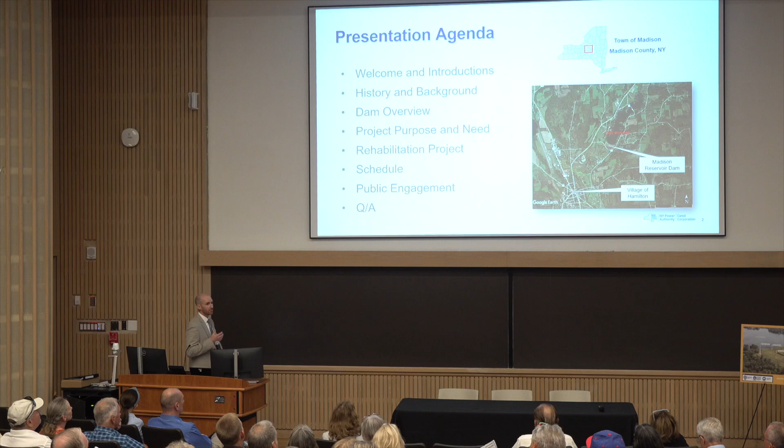We'll dive right in here. We've got a lot to cover, and as already mentioned, there's been a lot of work going on behind the scenes the past few years. We have progressed the project. Everything isn't finalized yet, but we're certainly at a point right now where we need to get out here. This turnout is great. Greg, thank you for allowing us to get the lay of the land here. It's great to see people from the reservoir, from the lake, from the village, and other areas.

I encourage you to pay attention and think of questions. We've got our engineering team here, and others from Canals, and we really want to get feedback from all of you tonight. We'll also tell you what you should begin thinking about, and how you should start preparing for this project, because it is coming.

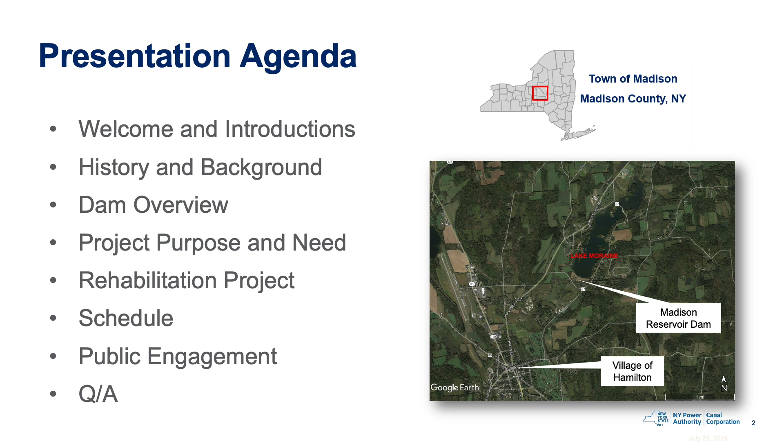So to walk through our agenda: we've already done our welcome and introductions. We'll do a brief history lesson on the dam and the Chenango Canal, then shift to current times with an overview of the dam. I'll talk about why we're doing this project, the purpose and need for it, and give more detail on the rehab project that's coming. We'll touch on the schedule at a very high level—we're still pretty far out, so we're laying out some year milestones now. Then Jackie will give a brief public engagement update, and we'll get to some Q&A.

So why now? My job's been made pretty easy here—I think we really heard from the mayor, the supervisor, Joe and Jackie why we're here tonight, and I think you guys know too. The first circle here is the New York State Canal Corporation. Canal Corp is the owner of the dam, and we fully accept all responsibility for the structure. We're responsible to operate and maintain it, and to ensure the safety of the structure for the people on the reservoir and everybody downstream.

So it's our dam. What are we trying to get to? We'll touch on some of these points throughout the presentation, but it comes down to a few things: a state of good repair—we're trying to get the dam to this state. Resilience—weather seems to be getting more extreme these days, we've all heard about it, so we're going for this higher level of resilience. And in doing that, we're going to reduce the risk that dams do pose to the communities downstream—risk reduction. To really hammer it home, public safety is paramount here in this project, you'll hear me mention that a lot. As we've heard from the supervisor, the mayor and others, we fully recognize that this dam and reservoir really is a great asset for the community, and there's public benefit here. So these are some of our main themes for the project.

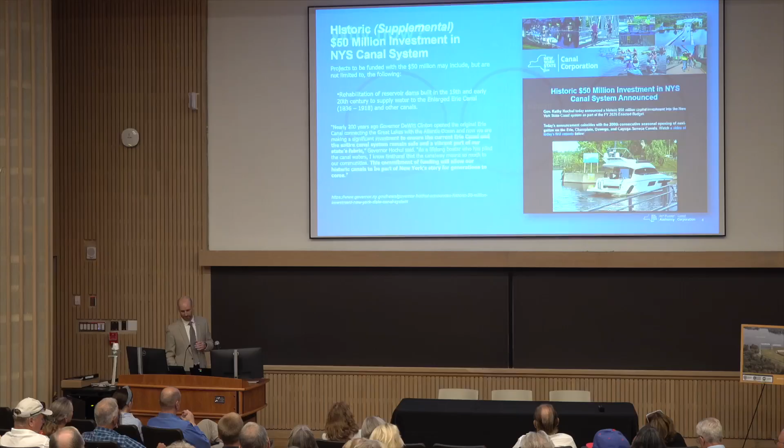Drilling in a little more on where we're at in funding this project: back in May of this year, the governor made an announcement, and it was really exciting for us. She announced an additional $50 million investment in the state canal system. We have our typical annual operating budget and our capital budget, but this was an additional $50 million that we hadn't typically gotten—a big deal for us, because now we have additional funding to take on some of these projects. Drilling into that press release, I encourage everybody to go ahead and Google it—you'll find it quickly and can read the whole thing.

The first bullet mentioned for projects slated to be funded through this $50 million: rehabilitation of reservoir dams built in the 19th and early 20th century to supply water to the enlarged canal, 1836, and other canals, being the Chenango Canal, being this reservoir. So this project, Madison Reservoir Dam Rehab, is a top priority, and it's going to be funded by this additional $50 million.

I'm going to read a couple more quotes from the governor because I think they're telling for how she feels about the canal system, and how you all feel about Lake Moraine and the ties you may have. The investment is to ensure the current Erie Canal and the entire canal system remains safe and a vibrant part of our state's fabric. This commitment of funding will allow our historic canal to be part of New York's story for generations to come. Jackie mentioned some of the hardship we're going to have in the meantime, but we're really forward looking here, and we're looking to the future.

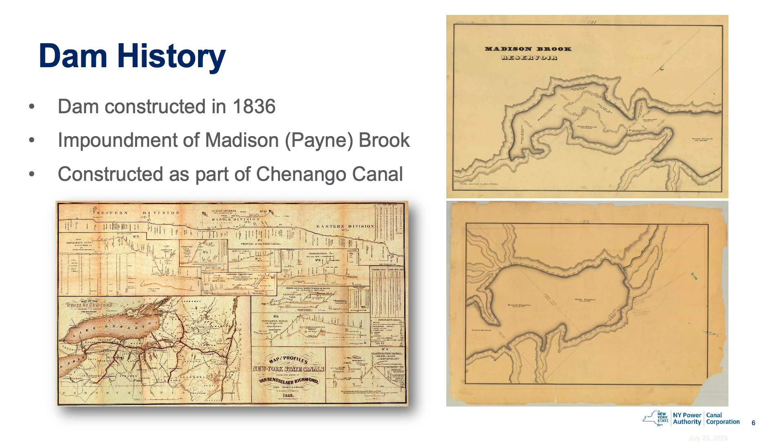The two drawings are original contract drawings showing the limits of the reservoir when it was built. I'll walk through a couple photos, but it's interesting that as you go through the village, you see nods to the canal days of yesteryear throughout, with some murals and historical markers. The Chenango Canal connected Utica and Binghamton, and Utica connected to the Erie Canal, allowing trade and commerce along that route.

The reservoir served as a feeder to the canal until 1878, when the Chenango Canal closed. It was one of seven feeder reservoirs in the area that fed the canal, and you're probably aware of a lot of the other ones.

A lot of people have driven out of Utica - you climb up Route 12, climbing grade, and in order to do that the canal had to be fed by reservoirs. There were also on the order of 116 or 117 locks that the canal needed to get boats up and down out of Utica and then back down to Binghamton.

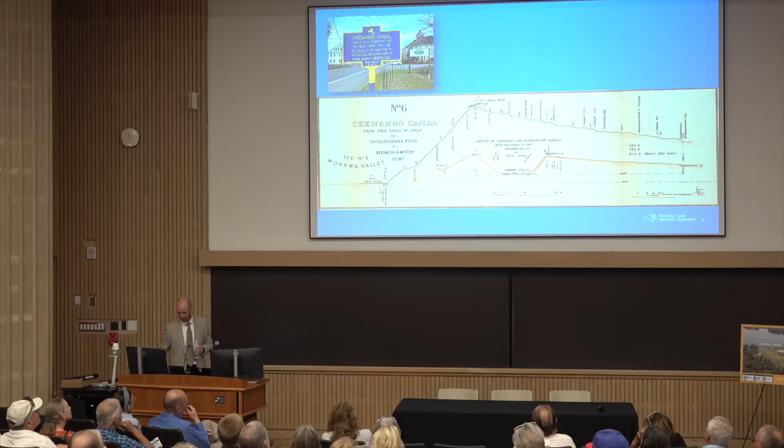So fast forward, looking more now to modern day times. The reservoir, most people probably know, no longer is used for canal operations at all. There is no Chenango Canal anymore. It closed in 1878. It does not feed the Erie Canal.

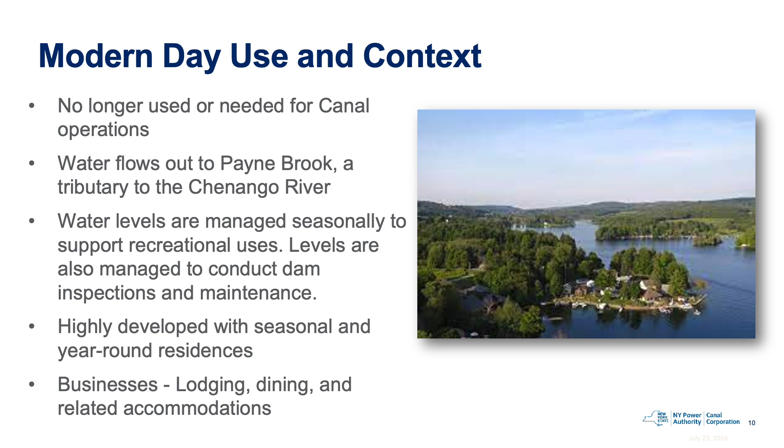Water flows out to Payne Brook and eventually makes it down by Colgate to Taylor Lake and on its way to Chenango River. We're responsible for maintaining the dam and the outflows from it, so we manage those seasonally to support recreational uses, really for public benefit. And we also manage the levels to conduct maintenance and do inspections, because this is a man-made structure.

This is all obvious stuff. The reservoir now is very highly developed. There's seasonal, there's year-round residences, and it really kind of supports a microclimate or economy of lodging, dining, some businesses, and related accommodations.

Just a little bit more on what it's used for now. So it's a public asset, an ecological asset. There's many different users of the reservoir, not just the folks that live on it, but it's very popular for fishing, boating, swimming, and other water sports, and obviously Colgate has an interest in it too.

So I'm going to shift now to just an overview of the dam. Again, this is very, very high level. If you do want to learn more about it, I encourage you to talk to some of our engineers later in the Q&A or in the after session. So I'm just going to kind of hit the main features of it.

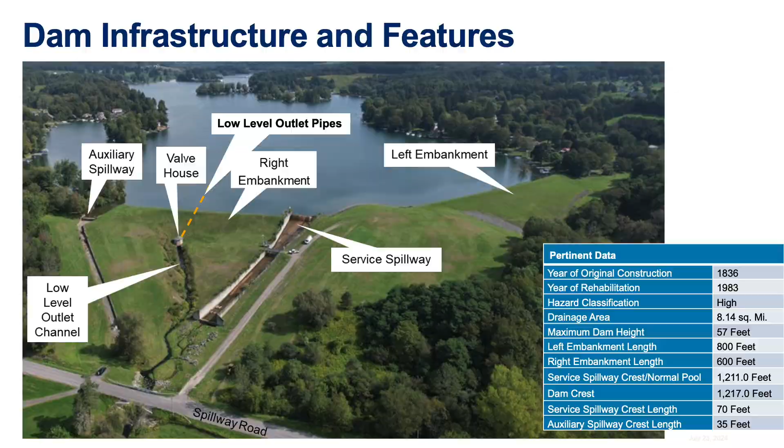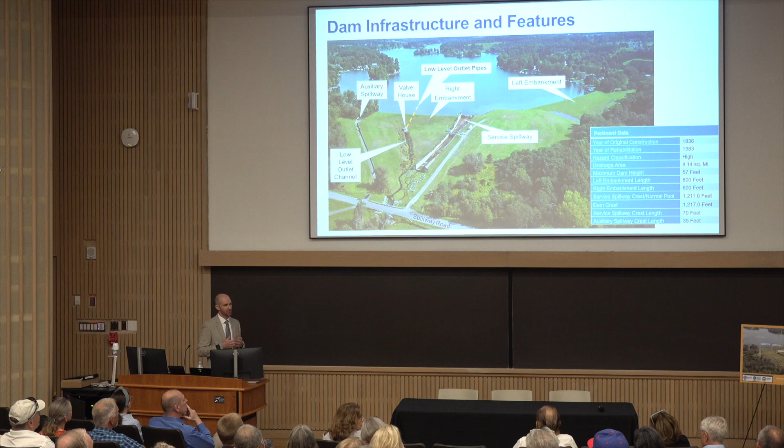Just a few highlights on the pertinent data. This reservoir is fed by an 8 square mile watershed. Greg always reminds me, out of the reservoirs we have, it's one of the larger watersheds, and that's an important fact. And when we get to some of our control of water measures and our drawdown measures, that's really an important thing. At the highest point, the dam, I believe it's the left embankment, is 57 feet in height.

And it's hard to wrap your head around some of the numbers I'm going to share now, but the volume, how much water is this holding back? It's a lot. 176 million cubic feet. And to put that into gallons, it's over 1.3 billion gallons. So there's a lot of water in there. I don't think that's a surprise to anyone here.

Just a little bit more on some of the primary features of the dam. There are 2 earthen embankments, totaling 1,400 feet together. The right embankment is 600 feet long, and the left embankment is 800 feet long. Again, these are built from earth.

The low-level outlet works, I talked a lot about them already, but we have an intake structure within the reservoir. There's 2 16-inch cast iron pipes that convey flow out, and then they're controlled at the brick valve house that you can see from the road.

That allows us to always pass flow through those pipes, because essentially the reservoir impounds Payne Brook. We have to keep flow going through Payne Brook, so that provides our minimum flow. We're always passing flow through there, and we'll always be passing flow through there when we do get to the rehab project too. An important function of the low-level outlets is, in case of emergency, maintenance, or inspection, it allows us to bring the reservoir down.

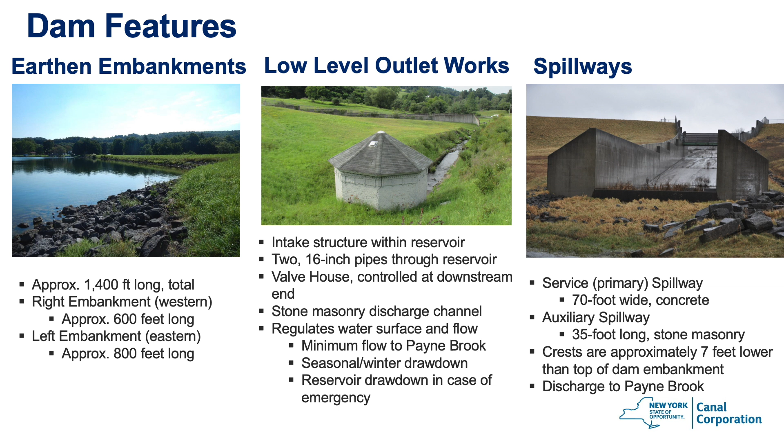The spillway, it's probably pretty obvious to most people, but it serves a very important function. We get a storm, we get a big flood, and this allows us to safely pass that flow through our dam.

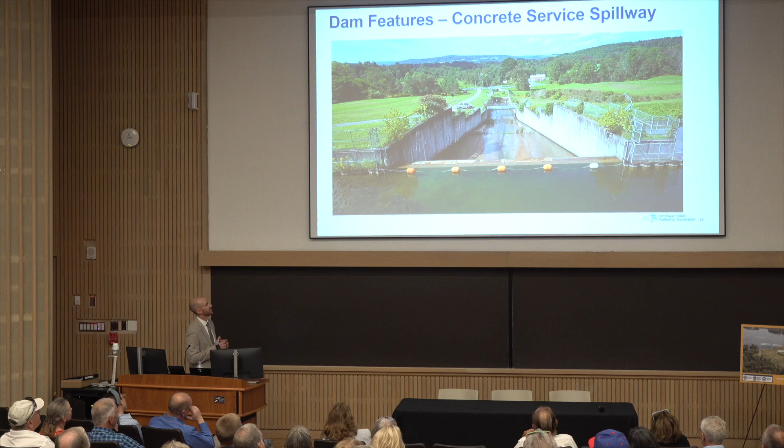Okay, so just some really interesting views, our engineers got these from drones. They're just really neat photos, probably perspectives you haven't seen. This is, pretty obvious, standing and looking from within the reservoir, looking downstream towards Spillway Road.

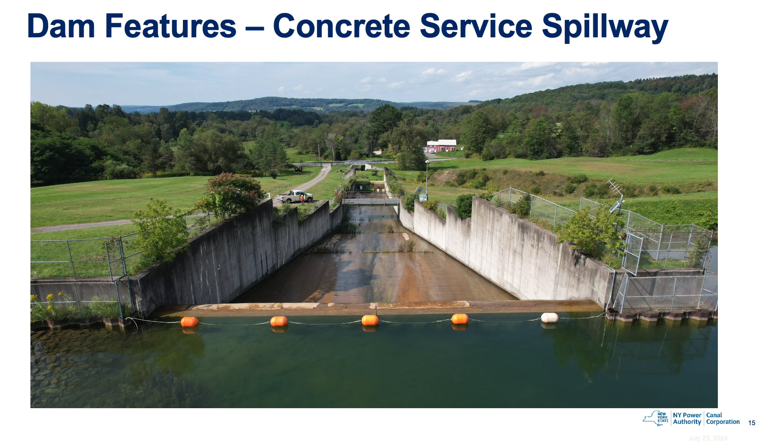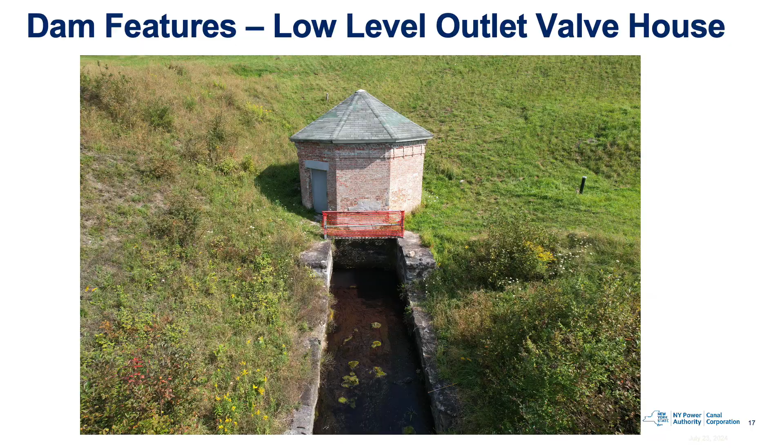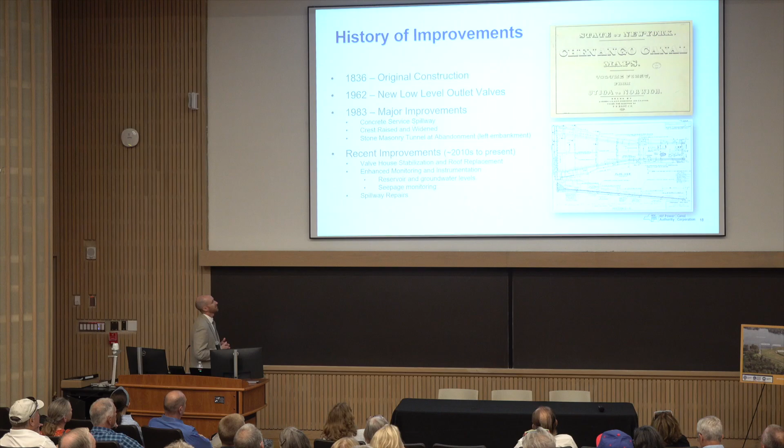So just shifting now to, you know, this dam is almost 200 years old. Dams are man-made structures, they require operation and maintenance. They require upgrades, they require repairs. This list is not by any means all-encompassing, but we just wanted to highlight some of the major points in the history of the dam.

Built in 1836, approaching 200 years old. In 1962, fast forward over 100 years, there were new valves that were installed in that valve house on our low-level outlets.

In 1983 was really our only major project. I saw some of the drawdown photos. That's awesome, I'm glad somebody brought those for that work. But that was our one and only really major rehab project to date on this dam.

So that big concrete service spillway that was built during that project, there was some earthwork. The crest was raised and widened. And we'll touch on it briefly, there's an old stone masonry tunnel on the left embankment that was abandoned to some degree.

Some of the recent improvements we've done, from the 2010s to present, we've done some stabilization to that old valve house. It's in tough shape, but it's a historic, interesting structure. We've installed a lot of electrical and water level type monitoring devices that really give us a good real-time and remote look on the condition of the dam, and I'll touch on some of that.

So it allows us really to see the water levels within the embankment of the dam. That's critical to understanding how your dam's performing, and also the water level within the reservoir. Recently, we did some repairs to the spillway back in March, and I'll get to that.

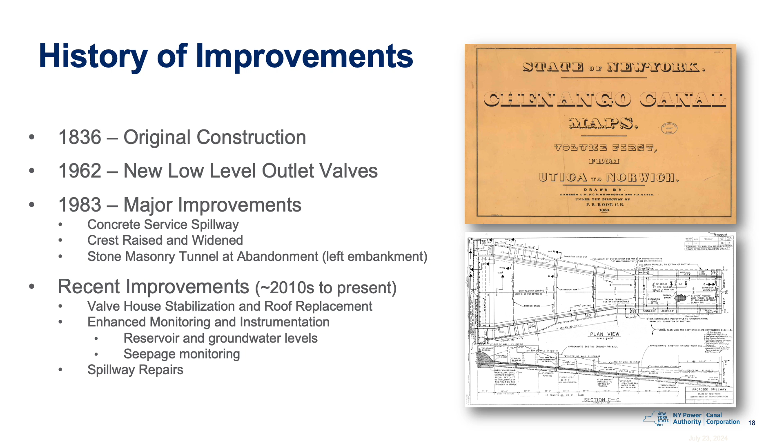But you look at this, you consider how old the dam is. You look at the original title sheet for the contract drawing, and this is it right here, right? It's almost a 200-year history.

So that's it for the overview of the dam, the history of the dam. We're going to start now getting into why we need to do this project, and then eventually what the scope of the project is.

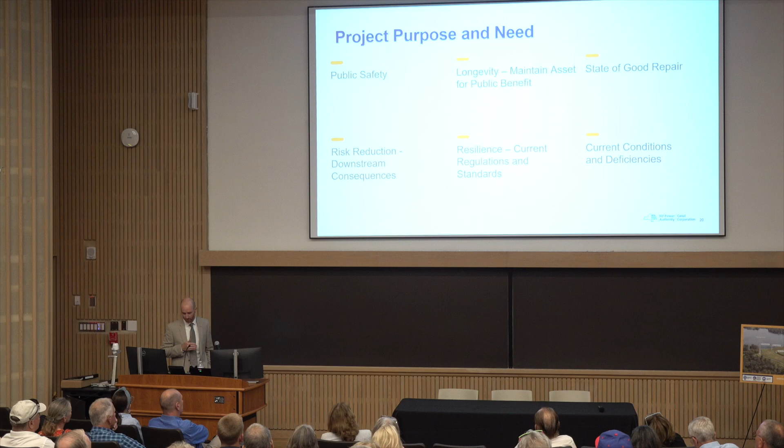So some more high-level bullet point type drivers, and I'll hit on each one of these in the ensuing slides, but let me just walk through them here. Public safety is number one. We were here 4.5 years ago, the mayor talked about why there's a downstream population at risk from this dam. Any dam poses a degree of risk out there, and that's no different here.

I touched on that already, so risk reduction, downstream consequences, longevity. We saw the governor's press release, we've heard some stories already. We're looking to maintain this asset really for public benefit. That's a big driver here.

Resilience, I'll touch on the current standards and the evolution of engineering over the past 200 years. But we're trying to get to this level of resilience that's adequate, that will provide public safety, it'll provide that risk reduction, and kind of what our guiding regulations and current standards are.

Related to this, we mention a lot nowadays that we're trying to get to this state of good repair. That allows us to get to an acceptable level to operate and maintain this dam. We're not in a reactive mode, but in a good state of repair, able to operate this thing well. And we don't hide behind this - there are deficiencies at the dam. I'll walk through those, and that's obviously a driver here too.

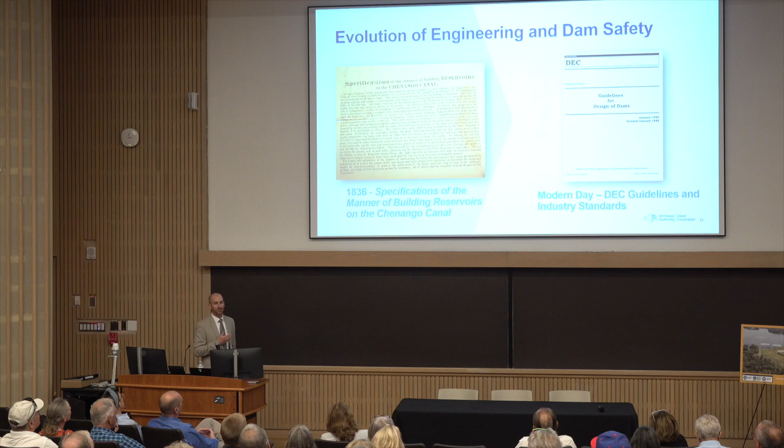So I touched on this already, but there's kind of two sides to this. Just as the use of the reservoir has evolved, as originally feeding the Chenango Canal, so has engineering, so has the industry of dam safety, so has our understanding of public safety and risk. This is a shot on your left of the original specifications these reservoirs were built to, and it's pretty interesting to read some of the verbiage there.

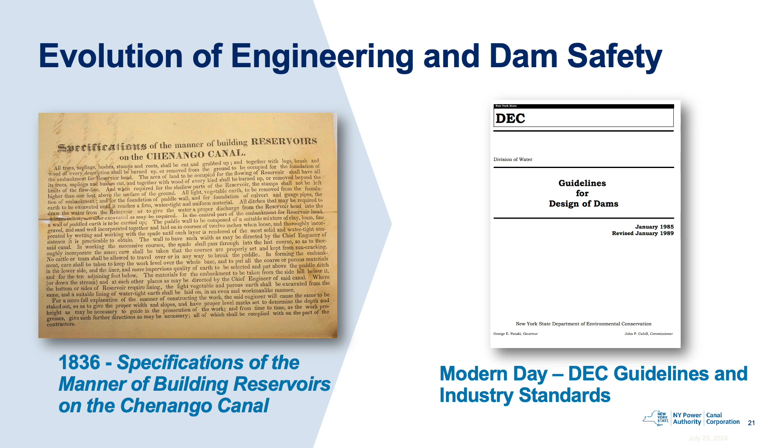We've evolved to more modern day standards, and in New York, we're governed by and aiming to be in line with the DEC guidelines for the design of dams and other industry standards. That's what we're going for. But the point is, it really should come as no surprise that buildings are built differently than they were 200 years ago, and it's no different with dams. So things have evolved - the hazard classification and the condition of the dam.

In New York State, and really anywhere in the country, dams are classified due to their consequences of failure. DEC has classified Madison Reservoir Dam as a high hazard dam. So what does that mean? A dam failure would result in widespread or serious damage to homes, damage to infrastructure, important utilities, or substantial environmental damage, such that loss of human life or widespread substantial economic loss is likely. It's obvious we do have some homes, we have the village downstream of the dam.

An important thing on the classification of the dam versus the condition - they're somewhat two different things. The hazard class of a dam is an indication of the estimated consequences if the dam were to fail. It is not necessarily an indication of the condition of the dam.

Dams are regulated structures. We follow DEC guidelines. Recently, we've been out there very frequently doing inspections and monitoring. We're required to do biannual and annual inspections. DEC comes out to inspect this dam biannually, so it's regularly monitored and regularly inspected. We're very upfront about some of these condition ratings, but in the most recent DEC inspection, the dam was rated unsound, deficiencies recognized.

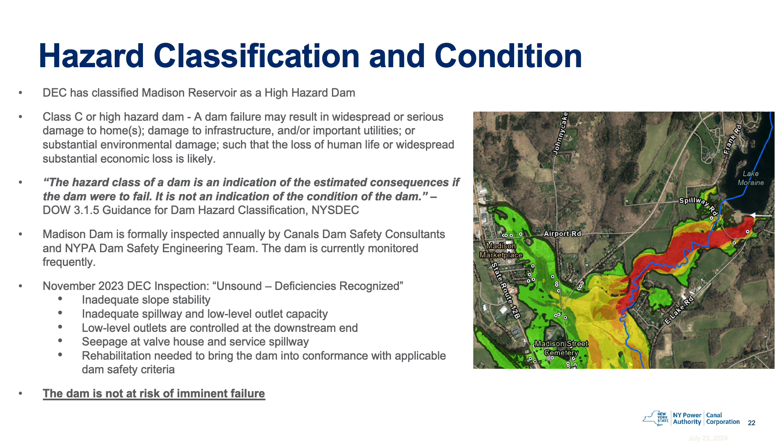The last bullet here is important, and Joe mentioned this already, thank you - the dam is not at risk of imminent failure. I'll say it again, it's not at risk of imminent failure. If it were, we would be doing things much differently right now.

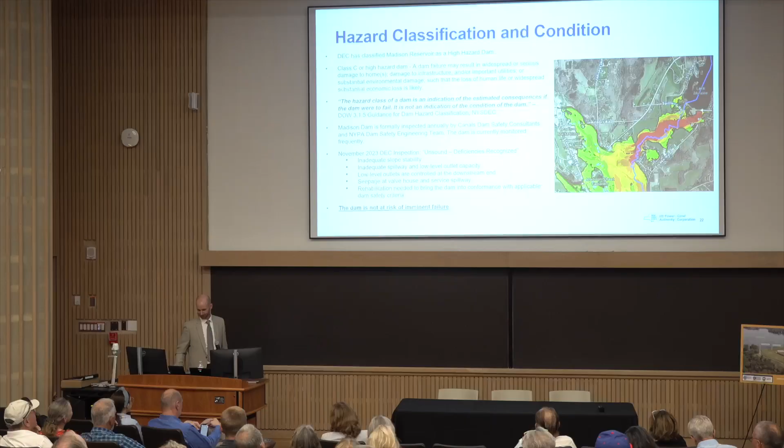I'm going to go through these pretty quickly - this is not an all-encompassing slide, but these are some of the primary deficiencies. I think it's important to remember the age of the dam, when it last underwent a rehab, and the fact that dams are man-made structures that require upgrade. So I'll walk through each one.

Number one, the spillway - again looking at modern day standards, it does not meet the current capacity requirements. The embankments, the earthen embankments, are very steep. Compared to modern standards, they're somewhat irregular - they undulate, you've probably seen it from the road. Related to the embankments, the crest, the top portion of the dam, is very narrow compared to modern day standards. The low-level outlets have a series of issues - the important one is the drawdown capacity.

The current DEC standard is to be able to bring your reservoir down to the 90% volume level in 14 days. The capacity we have right now is closer to 29 days.

I'll make one point that's not unique to this dam. Many dams in this area are in the same situation where they do not have sufficient drawdown capacity. The controls of the low-level outlets are at the downstream side at the valve house, so the pipes are fully charged, under full pressure through the dam. They're old, original cast iron pipes, very old. And we do have some seepage that shows itself at this valve house.

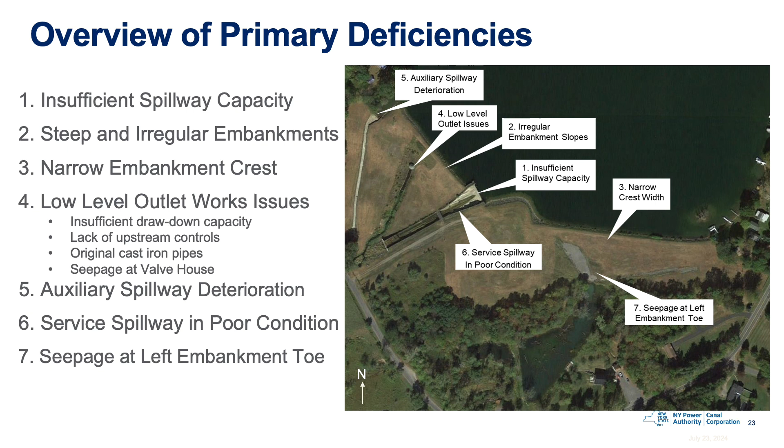The service spillway, we did some repairs not too long ago, back in March. There are some issues with that spillway as well. This is the one in the middle, the concrete spillway. And then we also have a seepage point at the left embankment toe where there used to be a tunnel that served as an additional outlet from the dam, which we're monitoring too.

Fast forward to May—this is probably in recent memory for many folks on the reservoir. The seepage we have at the left embankment toe from that old tunnel has always been there, but it started showing itself in a way it hadn't before. It appeared that it may have been increasing, it was roiling somewhat. In the end, we don't think things were really that much different, but as a dam owner, you always have to think of the downstream consequences, and you really have to be overly safe.

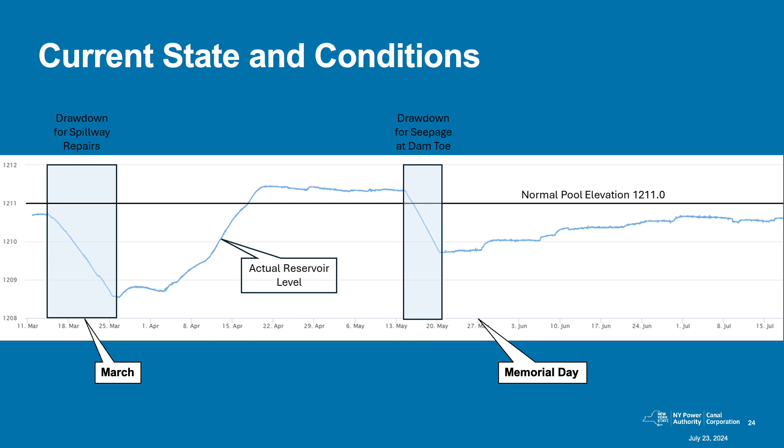But bluntly, we take no pleasure in doing this. This isn't something we wanted to do at all, but this is where we're at with the dam right now—we're really in a reactive mode. Things pop up, we have to take action, and there's really no way around that. Ultimately, the point here is justifying the need for this project. We can't continue like this. If we do, you're looking at more situations like this. What we want to get to is a state of good repair, where we've got a good handle, we're able to operate and maintain this thing, and we don't have to do this.

Okay, so shifting to the rehab project—we're in design right now. Design's not complete, but we have a really good picture of what the project will entail at a high level, and what the primary components are. Not everything is figured out quite yet, but we'll share what we can.

So again, some high-level things: what's our approach for the project, what are our goals? Simply put, we're going to address all the deficiencies we're aware of at this point. What's going to guide our design are the New York State DEC guidelines and current industry standards, and as I mentioned, we're going to get to that state of good repair.

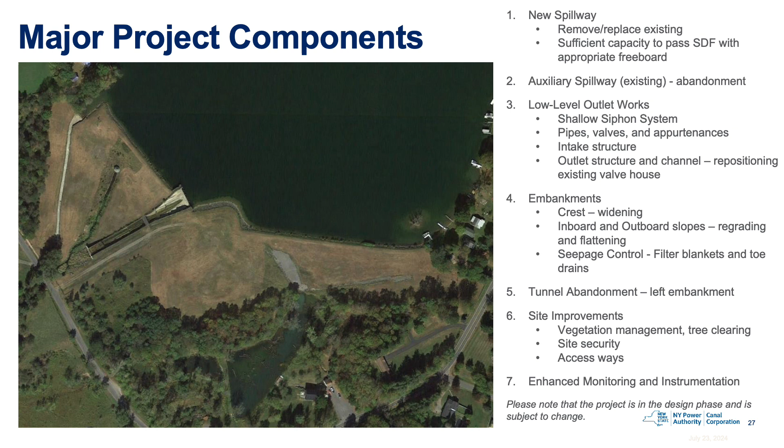So first, due to the condition of the spillway and its capacity issues, that spillway is going to be completely replaced. The existing one will be demolished, and we're going to build a new spillway. That's a big part of the project, and a big part of the schedule as well.

The aux spillway is basically going to be abandoned. Again, it doesn't really offer any value, it's just more of a risk to us at this point. So it'll be blocked off and abandoned in place, essentially.

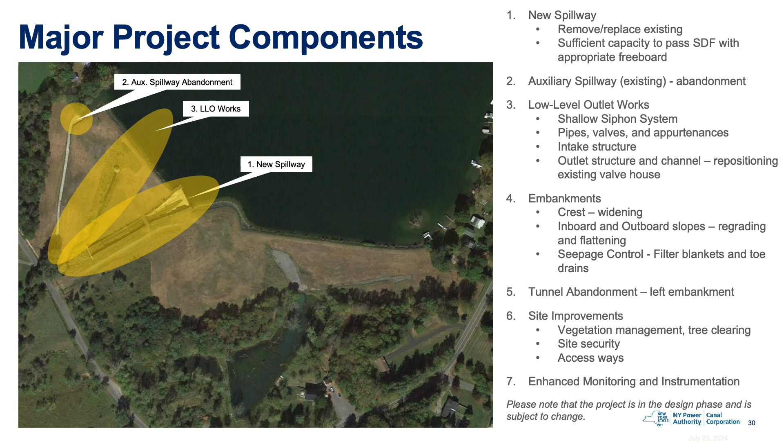We'll have a new low-level outlet system, so new pipelines, a new intake structure, a new valve house, and a new exit channel as well. That's another really big part of the project.

The tunnel, it's tough to tell on here, but the tunnel was somewhat abandoned in the 80s. We're going to do some more work to abandon it better, I guess, and also collect and monitor the seepage that persists through the tunnel.

Not shown in yellow circles, but number 6, just in general, some site improvements. There are some trees that need to be cleared on the periphery of the dam. Some site security improvements, think fencing, gates, stuff like that, and just new access ways across the dam so the maintenance guys can do their thing.

Number 7, enhanced monitoring, so there'll be more instrumentation that really gives us a good remote look, good eyes and ears on the dam.

And the last point here, in some of the conversations we've had already, we got asked this, and I think it was somewhat obvious to us, but I wanted to mention it. The current reservoir pool level is 1211. There's going to be no change to that. The level that the reservoir is maintained at now will still be the reservoir level after this project. So that's an important point to get out there.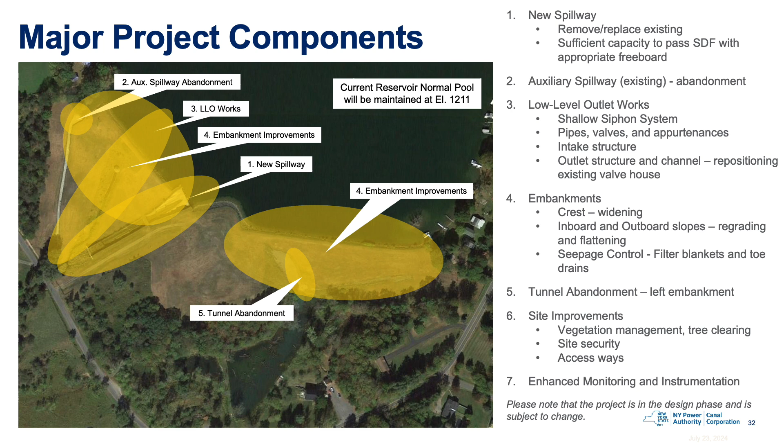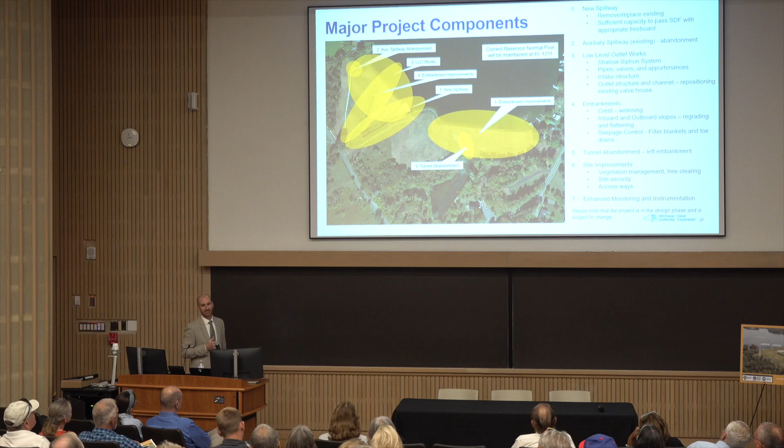Actually, before I leave that, when you look at this, there's a lot of yellow, right? The work's going to be going on across the entire site. And that's the other point of this. This is a big project. It's a big, big project.

So again, this is a major construction project. There will be work across the entire site, and actually within the reservoir on the inboard slopes at the dam. But this is heavy civil and marine construction, in general earthwork. There's going to be pipeline work, demolition of the original spillway, a lot of concrete work for the new spillway and some new structures. It's multi-year, multi-phase. This is a big, big project. Right now, we're anticipating 2 years for the construction of the major project components.

It's a big project. The picture here shows actually the DeRuyter Dam rehab that was done a few years back. And again, what you see there is work across the entire site. This project, in terms of magnitude and scale, is somewhat bigger than that project. We're building a completely new spillway. That's a lot of work. It's going to take a lot of time.

So, you know, Jackie mentioned it, the mayor and Supervisor Reuter mentioned it. You're going to feel impacts from this project. You're going to see impacts from this project. There's no way around it, but the project is necessary.

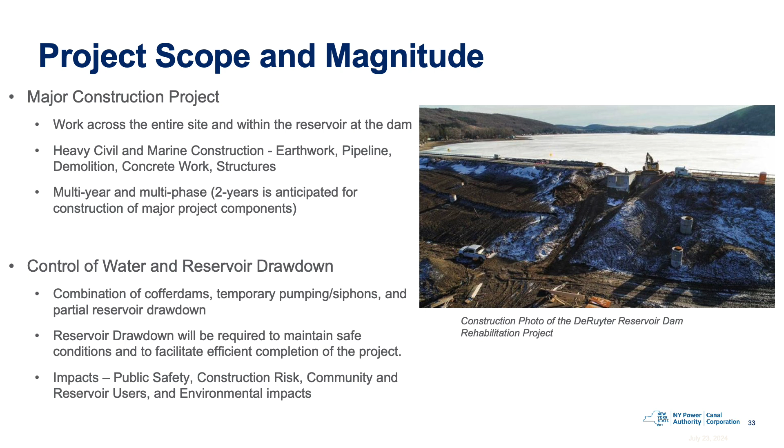But they're impacts, right? And we've categorized these impacts into various categories, and I'm going to talk through some of these. First and foremost, public safety is impacted by the construction project and the drawdown. The risk of the project, the cost of the project, the safety of the project - that's kind of lumped into construction risk. And then obviously folks that are on the reservoir, folks that fish in the reservoir, people that use the reservoir, they're going to be impacted too.

And there are also some environmental impacts. So before we get to that, I'm going to walk through these slides, but it's just as the title says - why is a reservoir drawdown required? It kind of comes down to two points. One I already touched on: the existing spillway is going to be demolished, and we're going to have to build a new spillway. So during that time, we will have no means to pass flow via spillway. We have to manage that with the drawdown.

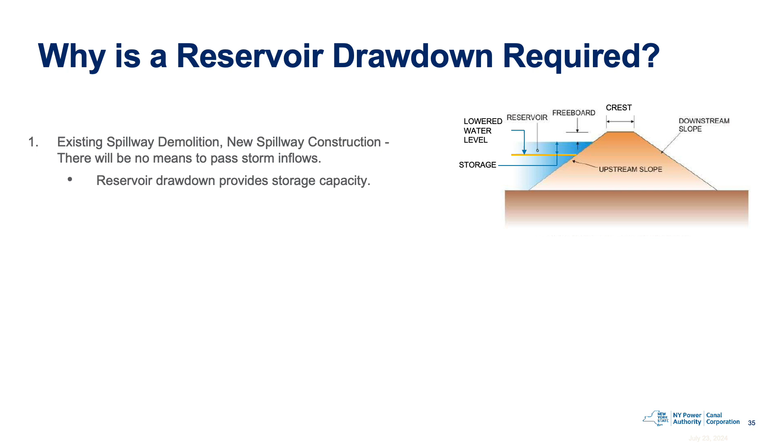Looking at the sketch here, this is a simplified illustration of the dam embankment in the reservoir, showing the typical condition. But what the drawdown does - that's indicated by the yellow line - it essentially gives us a buffer zone, providing storage capacity. So if we get a significant storm during construction, we've got that level of storage within the reservoir and we can take that inflow. If we didn't have that, we wouldn't be able to pass that flow. You'd risk, in worst case scenario, losing the dam.

And again, it's in its very vulnerable state, that can't be minimized at all. So we need that buffer. We need that storage capacity that the drawdown will provide.

The second part - there's a lot of improvements that are going to be done to the embankments. So completely regrading, a lot of fill. There's going to be some significant excavations within the embankments to install drainage features and other things. So we have to dig into the dam, right? And that's an alarming thing to do, to dig into a dam - it's a really concerning thing to do, certainly when a dam is full.

And simply put, we can't dig into our dam when it's at its normal level. So it's a bit technical, I'll do my best to explain it. You can see the reservoir at that blue water level, but any earthen embankment dam has essentially a zone within the embankment that's saturated - that's typical of any earthen embankment dam. That's indicated by the blue line that meanders its way down through the slope. So what you're seeing is somewhat where that line would be at the normal condition, and the yellow circle with the red outline is indicative of the excavation and earthwork we're going to have to do within the embankment.

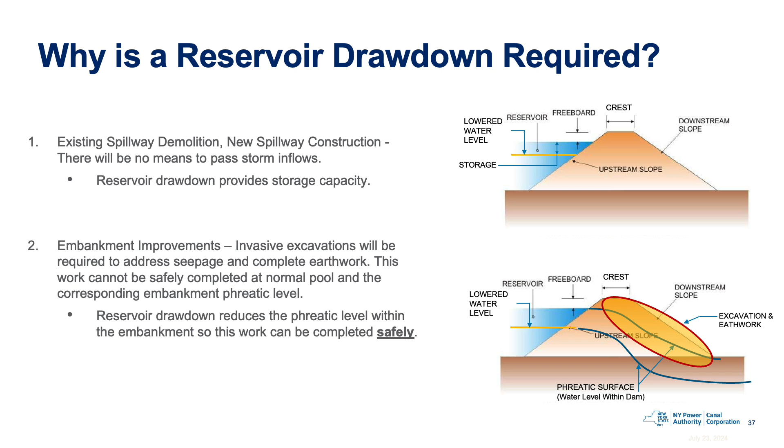We bring the reservoir down - that's going to drop that saturated zone in the embankment. That embankment's going to take some time to dry out, but that allows us to do the work that we have to do. So these are the two main reasons that a drawdown is required, and again, there's really no way around that for us to do this work safely.

So I'm going to talk now about some of the impacts and how we've categorized and evaluated them. This listing here is by no means all-encompassing, but these are some of the major impacts. A lot of these are pretty obvious, but I'm going to talk through each of them and how we had to balance them and where we arrived.

So community and reservoir user impacts - the shoreline is going to be impacted, and access to the islands will be impacted by this drawdown. Recreation will somewhat be impacted. Boating, water sports, swimming, fishing, ice fishing - all those activities can still occur, but at this lower level they're going to be impacted to some degree. Docks and the boat launch, obviously, will be impacted from where you'd probably normally keep them.

Water use - I'll talk about the survey we did back in the spring, but potentially there could be impacts to folks that have shallow intakes from the reservoir, and wells as well, or direct withdrawals.

Environmental impacts - potentially there's impacts to fish, aquatic life, and vegetation. The reservoir outflow, the flow through Payne Brook, we have to maintain that. We have ways we can maintain that, so we'll always maintain flow through Payne Brook. Some of the wetland areas could be altered to some degree during this drawdown period.

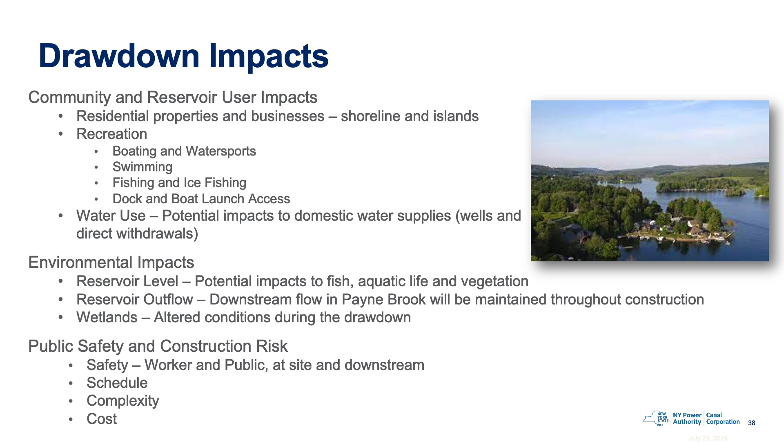The drawdown level and how we go about it also has major implications for the schedule of the project, the complexity of the project simply put, and the cost. It's a big driver for each one of these.

I'll take a moment here to thank everybody that did respond to our survey. It really helped us look at some of these impacts and balance them, and we really took a lot of this to heart. It took a lot of thought. Our engineering team, as Joe had mentioned, has been working diligently. This has been a very thorough process, and I'll get to the details of the drawdown.

The map shows essentially our survey response. Some of the pins in the middle of the reservoir aren't people floating around in the reservoir, but they didn't give us an address, which is fine, so we just lumped them right in the reservoir. But you can see we had around 114 respondents total, which I think is great, and we had really good representation across the entire reservoir. Thank you all again for that.

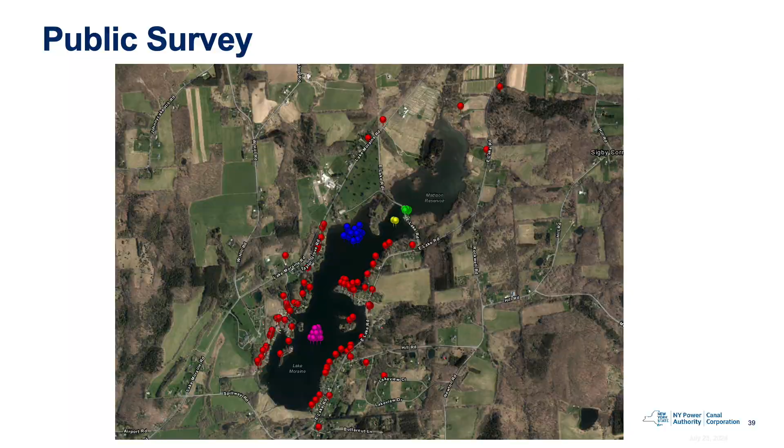So I'm going to walk through now how we went about balancing the impacts. We recognize there's impacts from this drawdown, and how did we determine the level we need to get to in order to safely complete this work and really minimize any adverse impacts to the community and the environment.

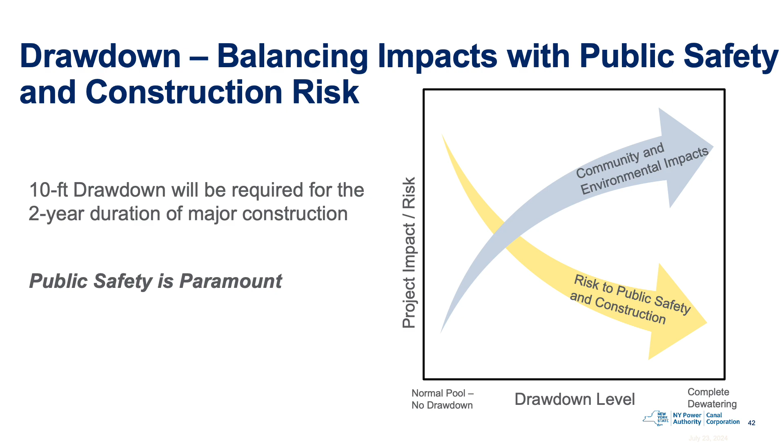And again, I can't state it enough, but public safety here really is paramount, ultimately paramount. We recognize you're going to feel it at the reservoir, you're going to be impacted in how you use it, but there are real consequences if we don't thoughtfully consider this and take it seriously downstream. Public safety is paramount here.

And again, it's kind of unique to where you are. I'll pause here for a minute. This image is going to stay up on the ensuing slide, so I'm going to keep moving here.

Right, so we kind of established why we had to get to that 10-foot level. We got some really good questions from the Lake Association and from Greg as well - well, why is this going to take 2 years, right? That's a big obvious question here too.

I'll caveat this now, a lot of this is still in development, but this is somewhat a preliminary sequence of the major project components. So it isn't necessarily stepwise as shown here. Not everything, the first thing, has to be done before the next thing is done - that is the case for some components. We have to get our low-level outlet system before we can really start abandoning our LLO pipes. But this is a first glance at what the sequence of the project might look like.

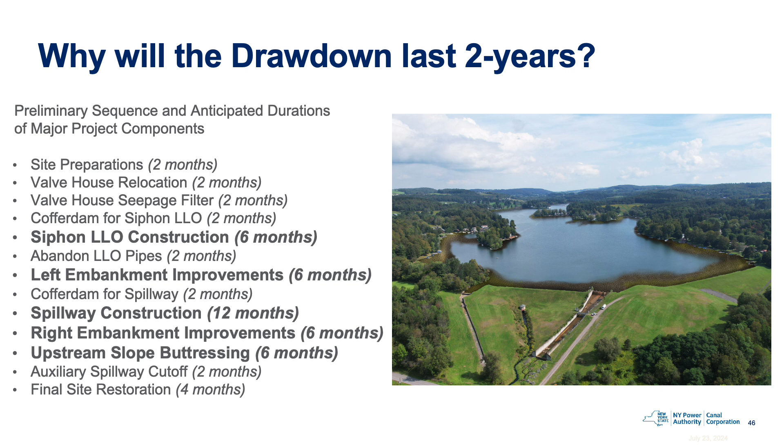The siphon, the new low-level outlet system, that's going to take some time. These are new pipelines, going in and out of the reservoir - that's a 6-month duration. The embankment improvements are long duration work items. And the spillway, you can see that at 12 months - that's really a big component of the project, and it's going to take some time to do.

So to take it a step further, what I just highlighted - what components require the reservoir to be drawn down - that's what's highlighted here. So you can see it's a significant amount of the work that has to be done with the reservoir drawn down. We're still very early on in design, some of this will change, but it gives you some concept of the scope of the project and why the drawdown is required.

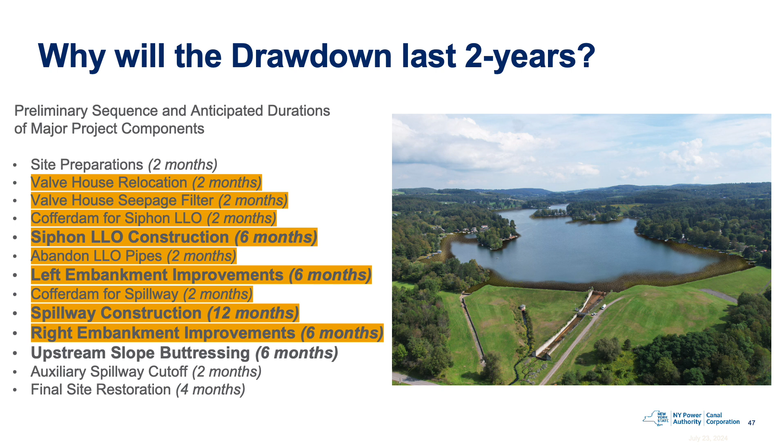So what to expect, and in some ways you might want to start thinking about how to prepare. I think a lot of this is obvious - again, this list is not by any means all encompassing, but just some high level points here. One more time, the drawdown level, we're at a 10-foot level, so that's below the normal pool or the current spillway crest. Our spillway is elevation 1211, we're going to get 10 feet below that - that's elevation 1201, just as it says here.

The duration is 2 complete years. Right now, I'll get to the schedule, but right now we're anticipating construction starting in 2026 and 2027. That's for the major project components, and the drawdown - we need to plan for that occurring for that full 2 years at this point. Prepare.

Again, this is not all-encompassing, but we learned from the survey there are at least a couple dozen folks out there on the reservoir where they have very shallow wells or a shallow intake, some at a level shallower than this 10-foot drawdown level. So you should start planning accordingly. Investigate the reliability of your water source and take action that you might need to. That's a different decision individually. It depends on where your well is, and how you want to go through this time period during construction. So that's somewhat of an individual decision.

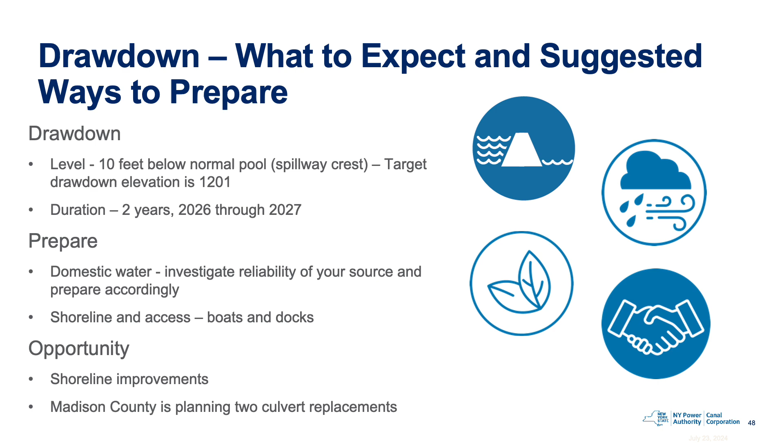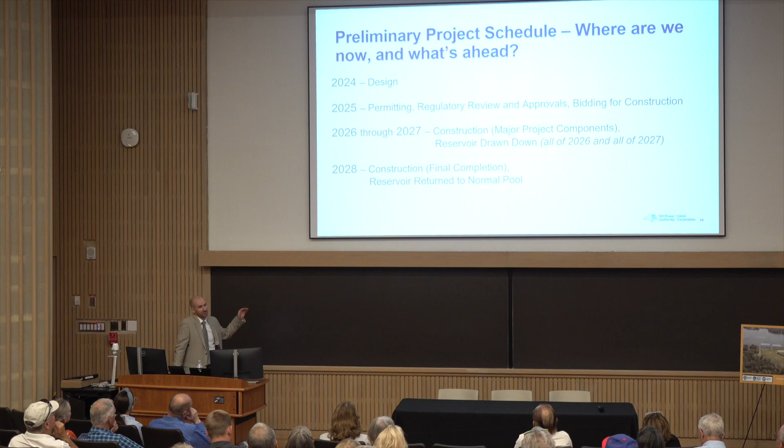We're almost there. Just the high-level schedule at this point - as Jackie noted, we're still very preliminary here, so when we talk about schedule we're really just talking in years. Right now, 2024, we're in design, planning to substantially complete it this year. Next year we'll complete design and get into the permitting process - all permitting, regulatory review and approvals. We're also planning to put the project out for bidding for construction next year. It's a significant project with a significant dollar value, and it will take some time to get that authorized on our end.

Shifting to 2026 and 2027, that's when we're planning to get into construction for the major project components, and that's also when the drawdown is needed - all of 2026, all of 2027. Getting to 2028, this is a big project, and work will continue into 2028 - mainly final site restoration, cleanup, commissioning of the dam, getting things up and running. There still will be activity 3 years out into 2028, but we should wrap up in 2028. The reservoir, we are anticipating bringing it back to the normal pool level in that final year of construction in 2028.